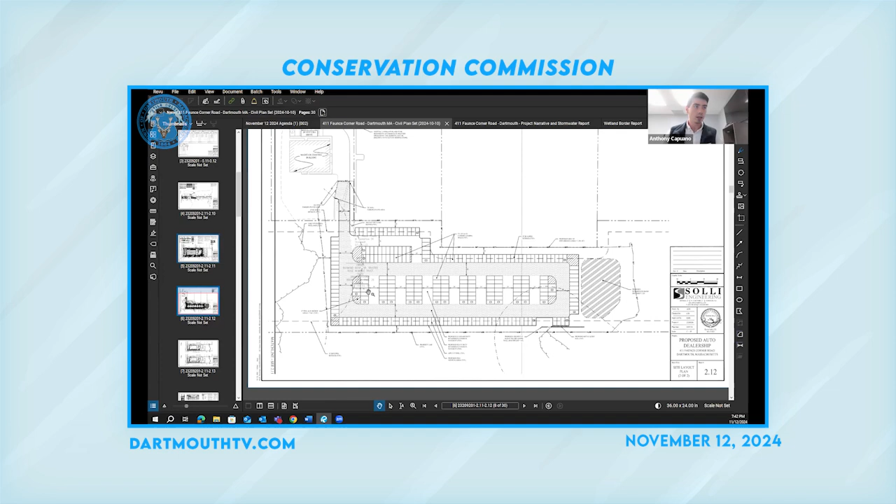Anyone looking at cars can be grabbed by dealership employees and brought out to the front. Back at the front of the site, there'll be two curb cuts to access the site off Faunce Corner, which we've designed for auto carrier loading trucks to ensure adequate ability to circulate the site.

That's pretty much the summation of the front. The existing cell tower, as mentioned before, is proposed to be maintained with no modifications to its fence or anything related to it.

Moving on to the grading of the site: under existing conditions, the majority of runoff from this front portion flows from west to east, from the road to this central wetland located just along the right side of the page here.

We're proposing to maintain that existing flow pattern with a series of catch basins, manholes, and water quality units, which will convey stormwater into the drainage system before passing through one of two treatment measures. We've got a subsurface detention system located just north of the building for detention and runoff mitigation.

In the southeastern corner, we're proposing an above-ground stormwater basin for additional attenuation. Water quality will be treated through two separate water quality units that all stormwater passes through before entering those basins and eventually discharging into the wetlands.

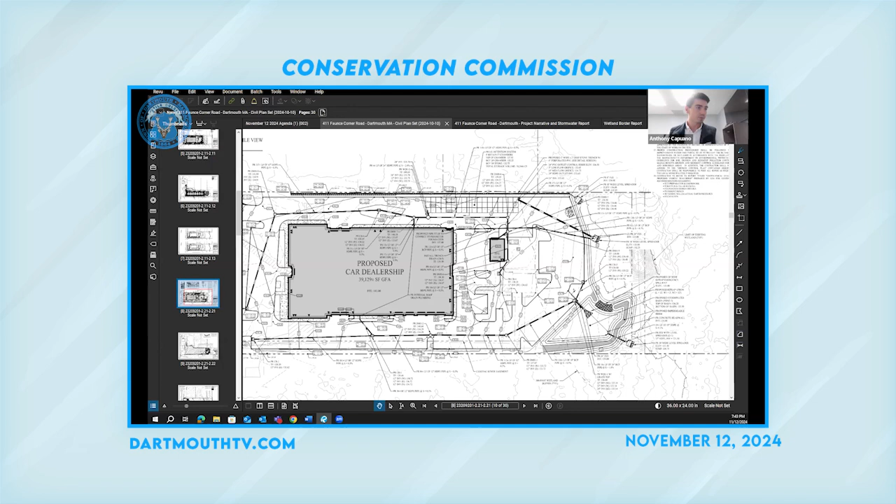In the rear of the site, similarly, everything flows from west to east towards another large wetland pocket in the rear. We're proposing yet another stormwater basin to attenuate peak flows in that area, as well as a sediment forebay to achieve some of that water quality volume.

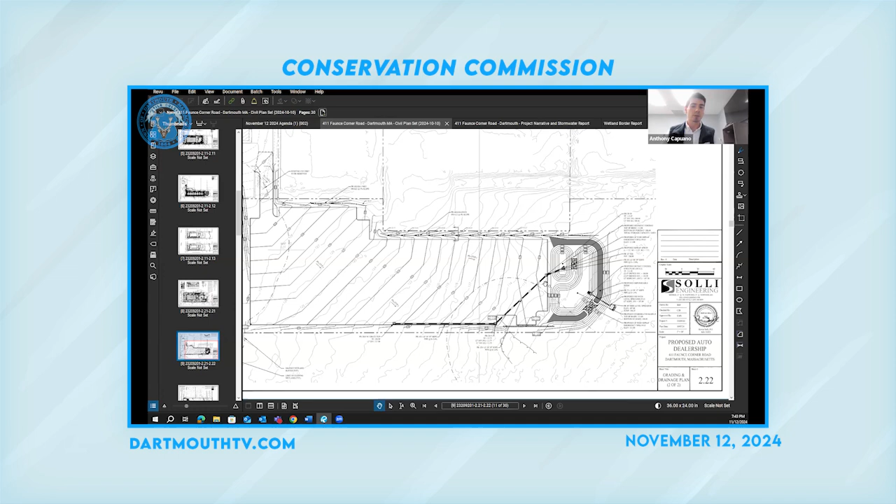I'll mention this again later, but we've received comments from both DPW and the town's peer reviewing engineer. Part of that will most likely end up adding another water quality unit, similar to what we have in the front, to provide additional water quality treatment in the rear of the site.

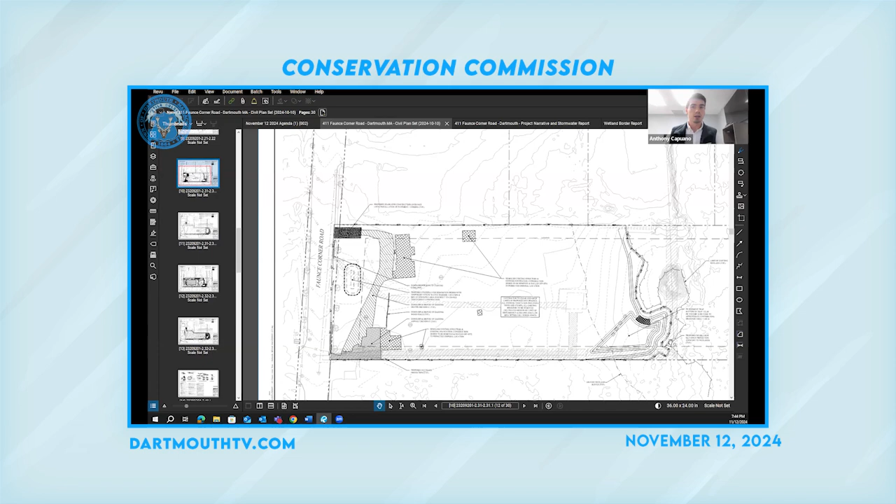To briefly go through our erosion control plans, we're proposing numerous measures including anti-tracking pads, stockpile areas, silt fence, and double row silt fence anywhere adjacent to wetlands. We'll also have sediment traps in both the front and rear of the site, as well as a diversion swale in the rear to direct all stormwater during construction into those sediment traps for erosion and sediment control.

Additionally, we have a utility plan proposing the site be serviced by public water, gas, electric, and sanitary. As mentioned before, this cell tower has service that comes from Faunce Corner Road.

It currently passes through the center of where this building is proposed to go, so we're separately working with Eversource to have that connection rerouted to a new pole in this southwestern corner and then run through our new parking lot to reservice the electric going to that cell tower. It will be affected by the development, but it will be rerouted through a permit we'll have done with Eversource.

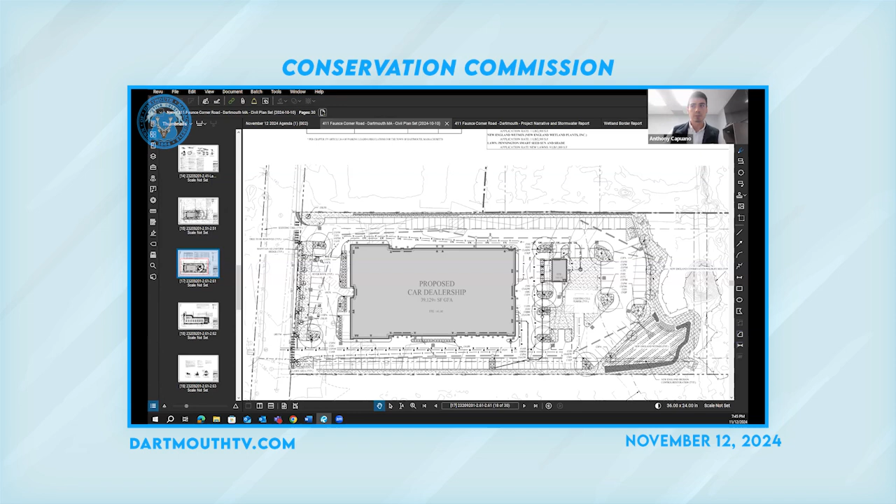We have a robust landscaping plan as well that consists of a variety of native trees and shrubs, ground cover, seed mixes. Forgive me, I'm not a landscape architect, so I'll try not to butcher some of these names, but there's a row of slender sweet gum trees along the frontage, as well as some Hicks yew shrubs, which will be visible from Faunce Corner Road. There's also a number of trees and shrubs that'll be apparent through the parking area.

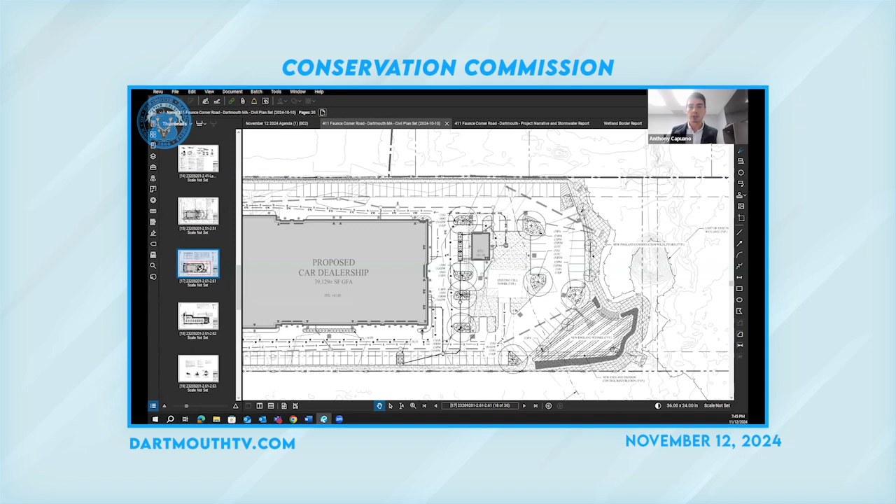In the areas directly abutting the wetlands, we're proposing a New England Conservation and Wildlife seed mix, as well as a New England wet mix in the basins themselves. That goes for the area in the rear as well, where these seed mixes will be installed around the basin. As far as lighting goes, there's a total of, I believe, 43 new poles going in.

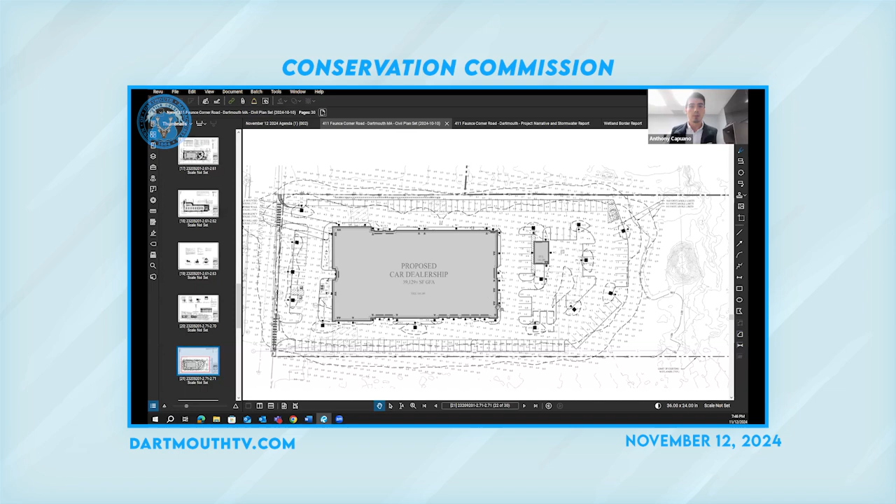In addition, there'll be 32 wall-mounted fixtures on the building itself, and some decorative bollard lighting fixtures in front of the building as well. The plan's been designed to best mitigate any light spillage over to property lines or into the wetlands, and all fixtures have been designed to be dark sky compliant and to minimize all light pollution.

So that is pretty much the overview of the project itself. As I mentioned before, we have received comments from both DPW and the peer reviewing engineer. We've currently worked through a majority of those comments, but specifically, one involves doing some additional stormwater testing for those three stormwater practices, both the surface basins as well as the subsurface system. We're actively coordinating those tests, as DPW has to be present for them, and trying to get them done pretty soon. Once that is all done, we'll be able to wrap up our responses to both DPW and the peer reviewing engineer's comments and get those revised materials back over to the commission. So that's an overall summary of the project.

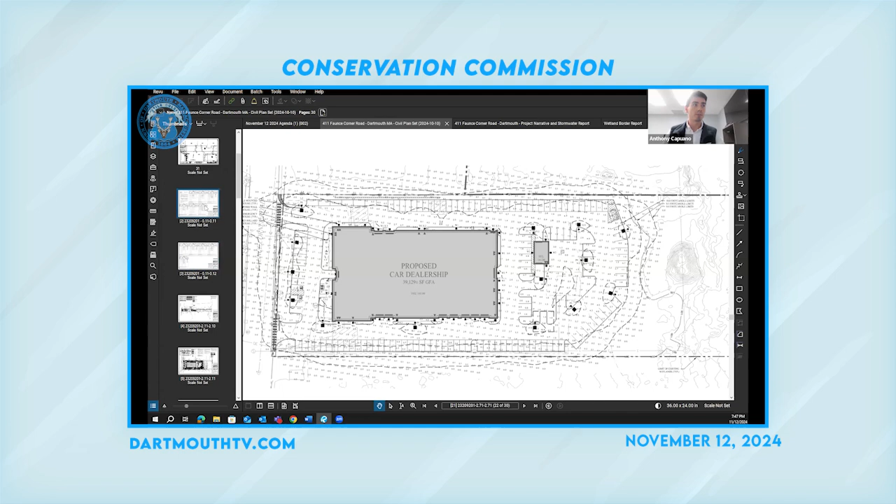Tom, if you're here, I'll give you the floor to talk a little bit about the wetlands themselves. I'm not sure if you want to share your screen or if you want me to just keep the survey up. If I could share my screen, that would be great.

Hi, everybody, Tom Schutz from Goddard Consulting. It's a pleasure to be in front of you tonight. I'm just going to share a brief aerial with you just to make sure everybody's aware of what the wetlands on the site currently look like.

It looks like I have to send a request to share my screen. I just submitted that request. It says the host isn't allowing multiple presenters for this meeting, so I don't know if somebody could give me the floor. That would be DCTV, who would allow you to share. Mike, I'm back right now, we had an electrical outlet shortage. Glad that you're back, hopefully that makes two of us. Would they be able to allow me to share, or otherwise we can just briefly go back to Anthony's presentation, just to show an aerial of the site in case the commission hasn't been aware of what the surrounding wetlands look like. DCTV, could you please allow screen sharing? That would be great.

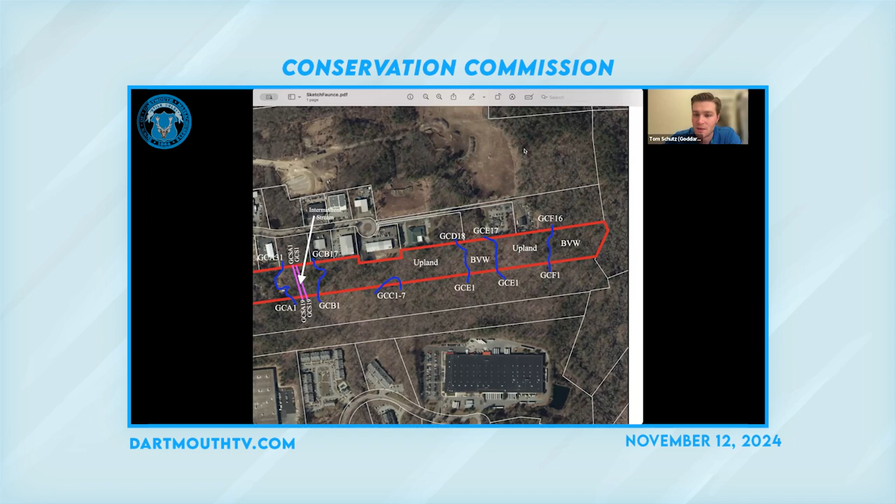The highest functioning value wetland on the site is this larger bordering vegetated wetland to the south. It's got an unimpacted habitat corridor from this large forested area running down towards the south. There's no large commercial buildings back there, and there's not any kind of human impact for the buffer zone. This area and the associated upland is not proposed to be impacted, and in my opinion, the project will have no impact on the highest functioning value wetland on the property.

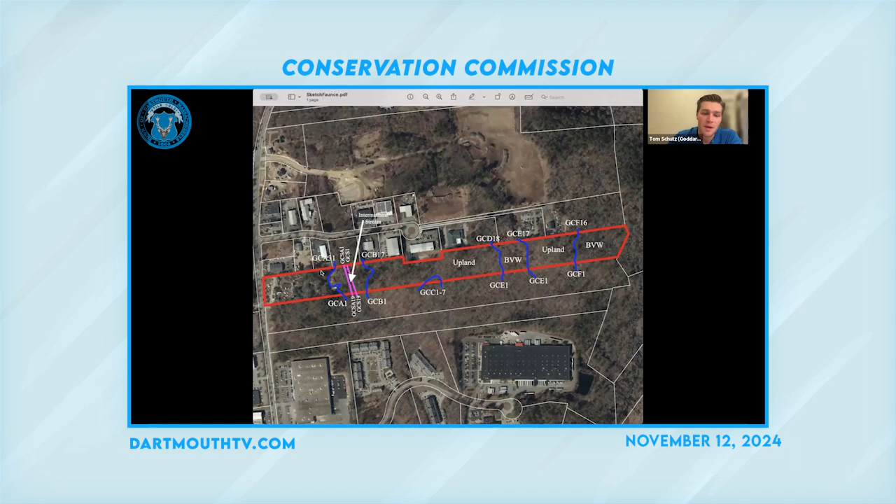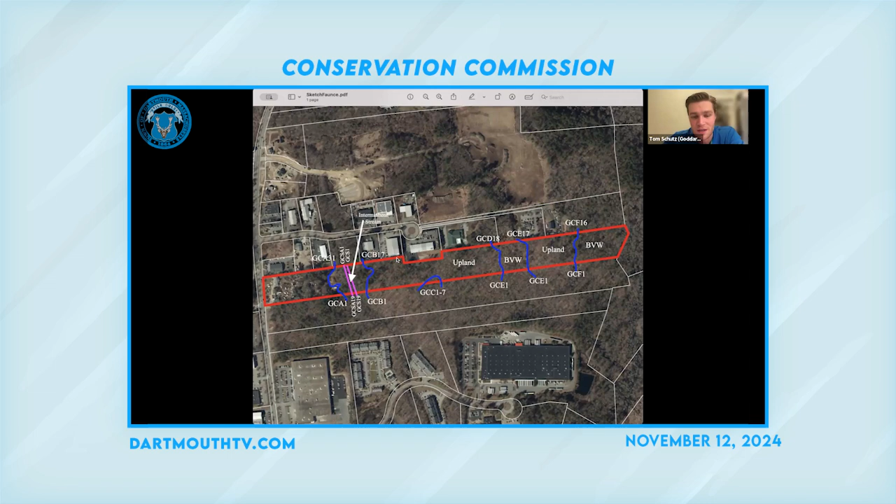These ones in here will serve to continue to remove any stormwater, but additionally the stormwater management systems for the property will serve to also increase the benefits for the site itself in general. So if you have any questions on the wetland itself, I'd be happy to answer them.

Thanks, Tom. Just to wrap it up, like I said before, we have those comments from DPW and the peer reviewer. This is a very intensive project with a lot of impervious area, large buildings, lots of parking, and multiple stormwater management systems, so we're aware it's a thorough process. We're working through all those now and hopefully will have those resubmitted soon to the DPW and the peer reviewer, and then take it from there.

We're obviously aware this hearing is going to have to be continued, so just wanted to put that out there. We are aware that the hearing will continue on to either the next meeting or the following. So I'm not sure if either the commissioners want to ask any questions, or Marc, if you had anything you wanted to talk about now, feel free.

Well, I think it's appropriate if your presentation is concluded that, Marc, we hear at least staff's initial comments relative to this. We understand there'll be some changes as a result of ongoing investigations from other boards and or departments within the town. But I'd be curious for conservation staff's observations on this particular application.

Sure, Mr. Chairman. First and foremost, Anthony and I had a conversation earlier today, and we both agreed that this will have to be continued because we're going to have plan revisions. There may be some calculation revisions, and those have to pass muster through the stormwater review of both the town engineer, who's reviewing it under site plan review, and our own peer reviewer, who's reviewing it based on wetlands protection. So we have those two reviews going.

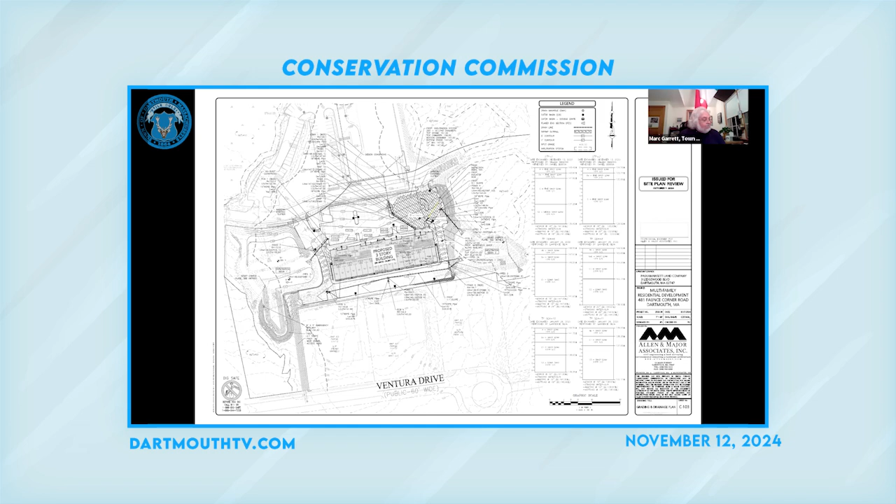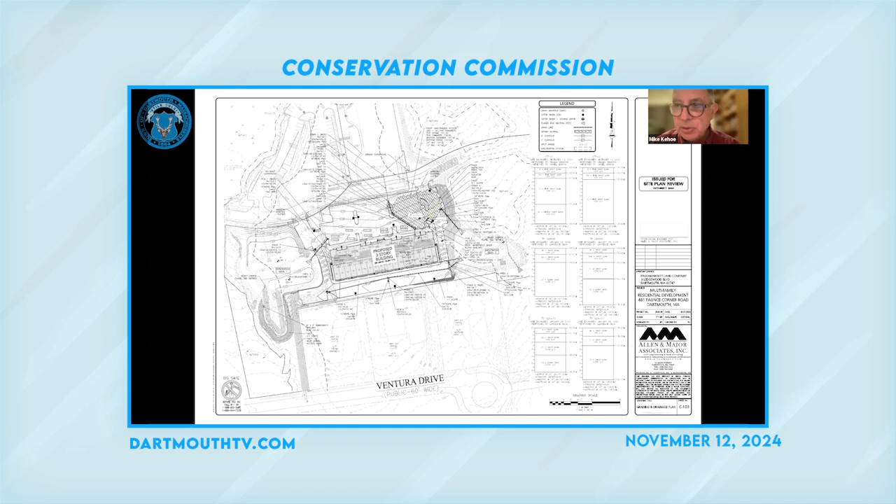Is there anyone in the audience this evening that wants to be heard tonight on this application, with the understanding we're likely to be voting on a motion to continue? Okay, I don't see any.

Anthony, you heard that Mr. Garrett is recommending a continuation of this, and he's suggesting perhaps that the 26th of November, which is our next scheduled public hearing, would be appropriate. Do you think you would have everything to conservation in time for them to review it for that meeting? By the way, that gives you a little less than 2 weeks.

Yes, absolutely. I would like to request a continuance to the 26th with the intent to get the material over to Mr. Garrett as soon as possible. All right.

That being said, at this juncture, entertain a motion to continue this public hearing until our next scheduled public hearing on November 26, 2024 at 7 p.m. So moved. Second. We have a motion and a second. So we'll do a roll call vote.